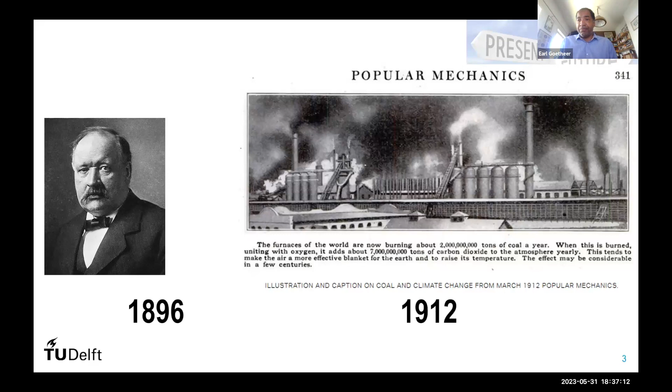And you can say, this was a paper in 1912 in New Zealand, but I can as well show you a paper from the Apeldoorn newspaper, and believe me, Apeldoorn is not a big city, saying exactly the same things. It was a paper from a little after 1930, saying it will be getting warmer. So we've known it for quite some years, and it's very hard to deny it.

At this moment in time, if you go to Hawaii, there's a nice mountain where we measure the CO2 concentrations. I looked it up this morning: 425 ppm is currently the amount of CO2 in the air. I always get the question, what is ppm? And I always say that's the same as going to a city like Amsterdam and finding 400 persons with one leg, because that's 400 parts per million. Amsterdam is roughly 1 million inhabitants. And it will dramatically change the society that we're going to live in.

And I'm a chemical engineer, so I can talk, of course, about houses and cars, but let's talk about the industry, because that will change dramatically. And now we see as an example a beautiful site in Germany, Ludwigshafen, and I like these kinds of sites. Beautiful. If you go to Rotterdam, you can see the same kind of things. And I'm trained like that. I'm trained as a chemical engineer to build factories like this.

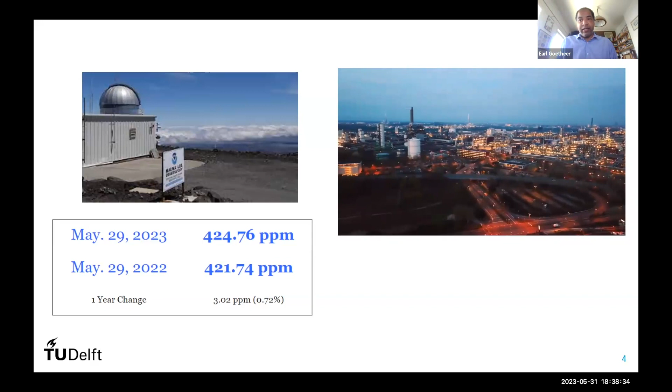But I can say to you, in the next 20 to 30 years, all these things are going to be gone, and hopefully, let's hope so, replaced by something else. So in your lifetime, you have to change complete factories like this. And it is not something that we have a silver bullet for. It's not like these nice dinosaurs saying, now we need a magic bullet to deflect our asteroid. That doesn't happen.

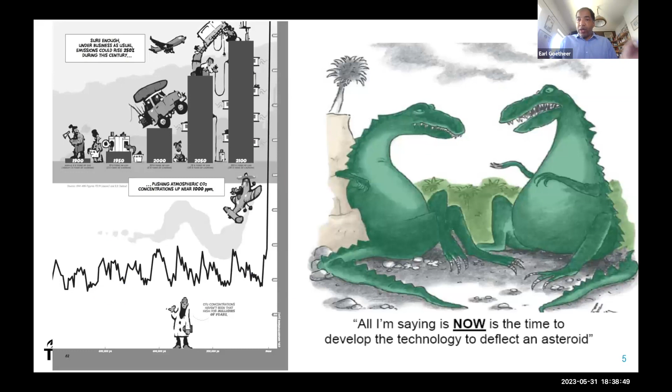So if you look from an industrial perspective, we need to do several things. There's not one thing. To really transform sites like Ludwigshafen or Rotterdam or Geleen or Terneuzen, we need to do several things. A shift to renewable feedstock, think about using biomass. A shift to renewable energy, think about electrification and using that for making, for instance, hydrogen. Doing things smarter, with process efficiency. The fourth element is circularity, bringing things back into a loop.

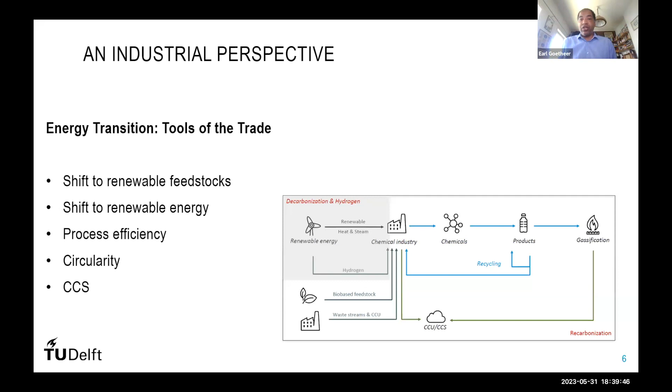And the fifth element is carbon capture and storage. Sometimes people call it CCUS, carbon capture utilization and storage. I don't like it. For me, carbon capture and utilization and carbon capture and storage are two different animals with two different rationales for doing them. But these are basically our tools. And just like a carpenter, you can't be a carpenter with only a hammer. You can't build any houses with that. The same is true for these kinds of techniques which we are talking about.

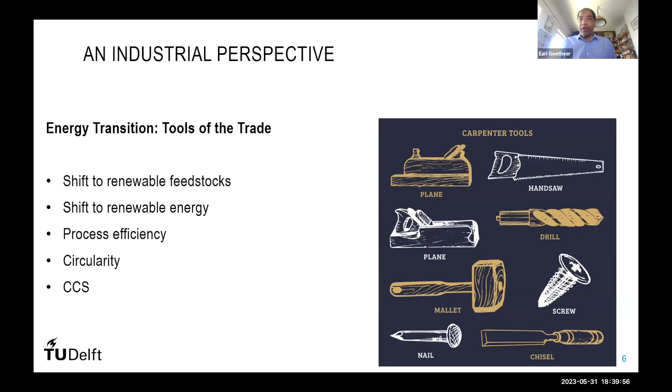So please do not do cherry picking. If you have these 5 different technologies, the 5 different directions, use them all. If you say, guys, I don't like this kind of technology, it's the same thing as going to a soccer team and saying, guys, I don't like you, let's take them off the field. And what will happen then, you will only have a team of 10 players, and most likely you will lose the match. And you can even see it in a different way.

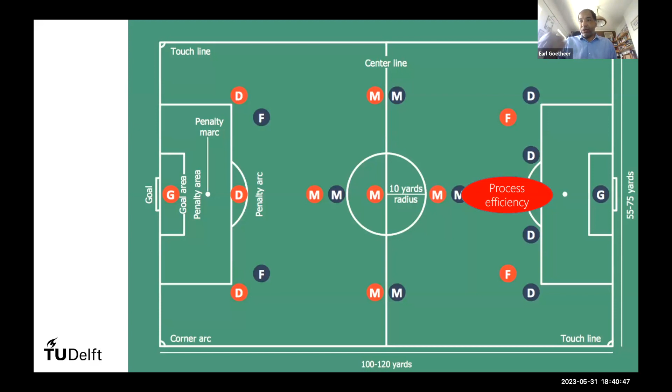Let's go further with the analogy of soccer. You always have the people making the goals. And in this case, process efficiency is in the forefront of our team, because you can do it now and you can get a business case out of that. So doing things smarter is really in front. The renewable feedstock, the electrification and the circularity, these are more in the middle. But in defense, we have carbon capture and storage. Why is it in defense?

Because I can use it nowadays with the current installations we have. We can put something behind it, and it's called post-combustion capture, capturing CO2 from the flue gases. Or we can do a pre-combustion capture system where you capture the CO2 before the burning. You can do all kinds of things, but often you can do it on the existing infrastructure. And so it is much more in defense.

But even with these 5 different technologies, we are not going to make it. So if somebody says to you, we are going for 1.5 degrees Celsius, hell no, you're going to be extremely lucky if you are around 2 degrees Celsius. And that will already be really very difficult. So we need something else. We need a goalie. And so what is in the goal? Negative emissions, carbon dioxide removal, basically capturing CO2 from the air and storing it permanently.

Why do we need that? Because we are going to overshoot like crazy. Everything we put in the air, so I'm now exhaling, that's 4% CO2 in my breath, will stay there for hundreds of years in the atmosphere. So all the CO2 which we are now emitting, you have to get it out of the air. Not me anymore, I will be retired. But you have to get it out of the air. And as already said, 400 parts per million in a city like Amsterdam is like finding 400 persons with one leg in Amsterdam and bringing them together in one room. You can imagine how much energy that will take.

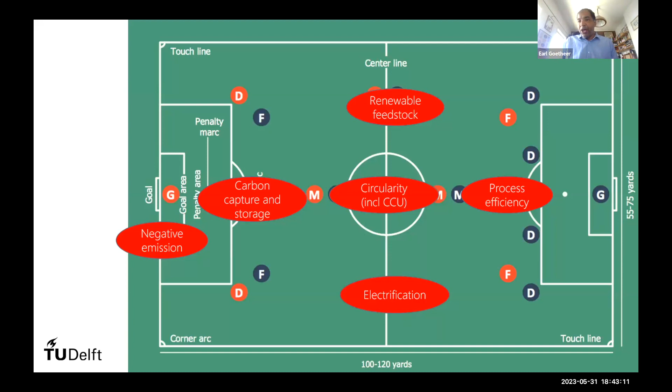So let's play a game of Mythbusters. You all have seen the series of Mythbusters. Let's do a special on carbon capture and storage and try to tackle 5 typically mentioned myths or facts. Let's see that together. So the first one is carbon capture is unproven. Now you can hear that a lot. So we don't know how it works, this is just a test. Is it really true that it's unproven?

So at this moment in time, there are around 40 megatons of carbon capture plants worldwide available. Now, is this a lot? 40 megatons? Nah, not that much. The Netherlands is now roughly 150 megatons of CO2 emissions. So let's say 1/4 of the Dutch emissions is captured by carbon capture and storage. And many of these carbon capture storage projects are not in Europe.

They are typically in the United States, where they store the CO2 in oil fields. Not because they like to store the CO2, of course not. What they would like to do is produce more oil. So it's called enhanced oil recovery. You capture CO2 and you pump it under the ground and you push out the oil. So that happens a lot in the United States.

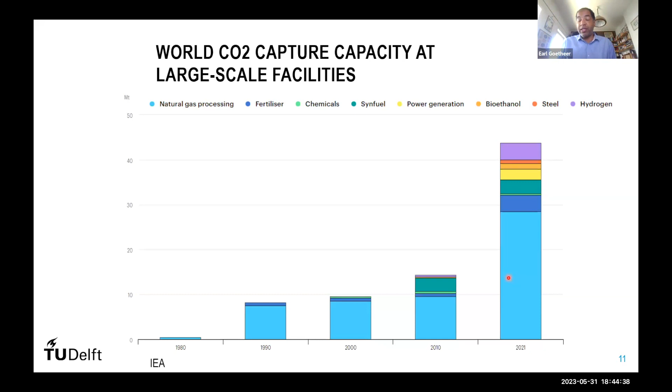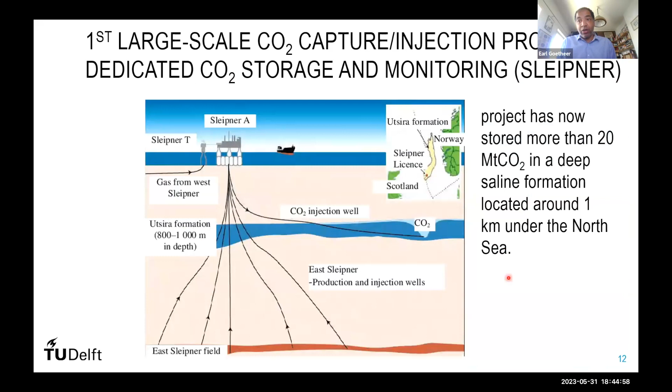But if you go a little bit closer to home, this is already happening from 1996, where there's CO2 co-produced with natural gas, and it is stored in an aquifer in Norway. And already more than 20 megatons of CO2 has been captured and stored underground. So yeah, is it proven? Yes, it is proven. The capture part is proven, and we know how to capture it, we know how to transport it, and we know how to store it.

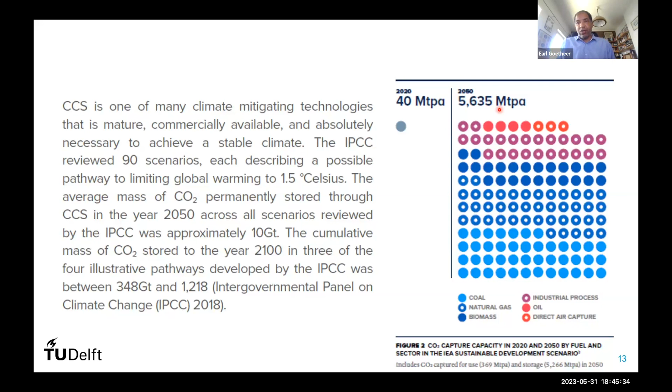But is it already developed on a large scale? Not really. So we are around 40 megatons, and according to the IEA, we need to be 2 orders of magnitude higher. So you can imagine the amount of scale up that is still needed. So myth 1, CCS is unproven. No, it is proven. We know how to do it.

Second myth, is it unsafe? Now, let's go back to what is carbon capture and storage. First of all, you have to capture it. Then you need to transport it, and then you need to store it. Now, capturing is just like any chemical factory. We know how to build chemical factories. So that's not a point of concern, really not. Transporting of CO2, either by pipeline or by ships in the form of liquid CO2, we are already doing that for 40 years. There are thousands of kilometers of pipeline, especially in North America. So we know how to transport it.

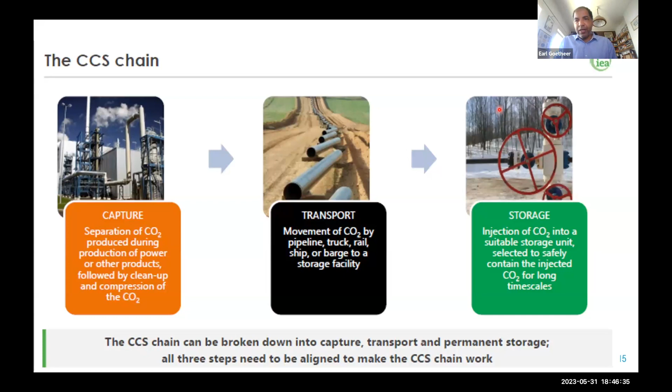Then storing it. Basically what we are doing is the reverse. In the Netherlands, we have a lot of discussion about empty gas fields where we want to store the CO2. In these fields, for millions of years, methane has been there. And the reason why is because you have all kinds of caprock on top of it. It basically seals the location where for millions of years natural gas has been trapped under it. So in the Netherlands, we have claystone, hundreds of meters of thickness, which prevents the methane, or in this case, the CO2, from getting out.

So yes, we know how to store it. We know it can be done safely. Of course, if you're going to put too much pressure into the field, you can blow off your caprock. But we know what the historical pressure was of that field. So we know what not to exceed. So yeah, we can do it quite safely.

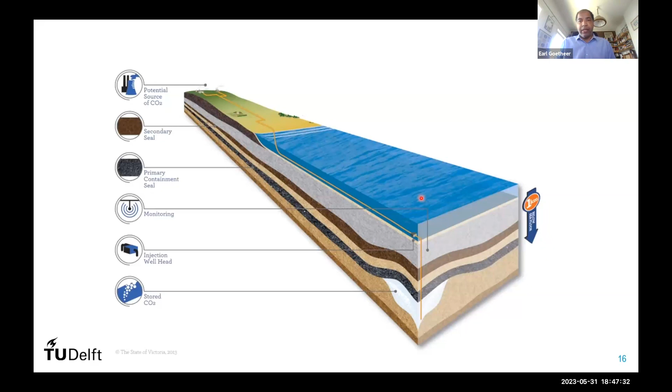The third myth, as I often hear, it is too expensive. Yeah, but what is too expensive? These are numbers coming from the United States, but they're roughly similar in Europe. Of course, if you want to do direct air capture, that is quite expensive. This is in dollars per ton of CO2. That is really expensive. I already said, please, let's limit that as much as possible. I don't want to capture CO2 from the air.

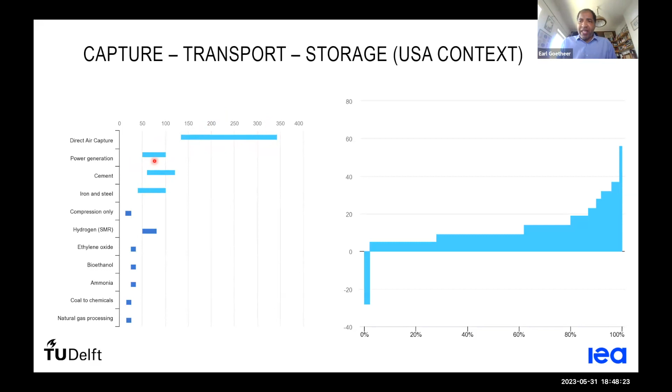So let's go back to the case of cement. That is the price of current cement, unabated. And if you want to do CCS, the price increases by 30–40%. The same holds true with steel. This is the current price of steel, and if I want to capture my CO2, we are looking again at a 30–40% increase. And if you want to go to hydrogen, that's even more expensive. But that's not the price which we are paying.

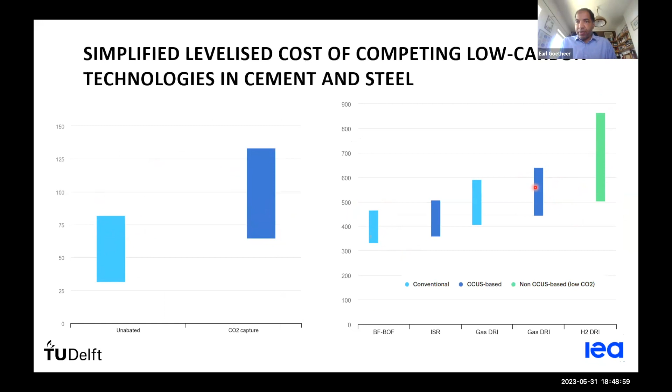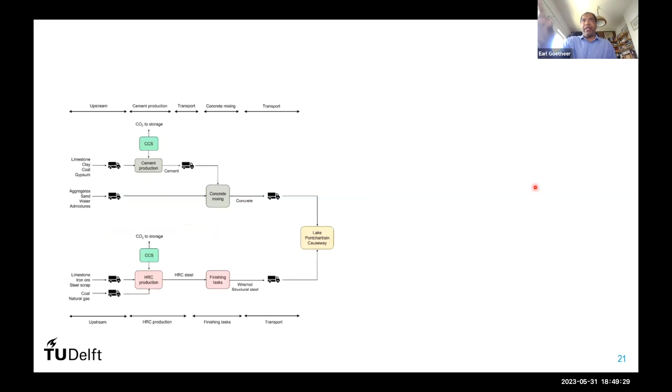So I'm very happy that one of my colleagues, Andrea Ramirez from the Technical University of Delft, together with colleagues from Norway, made a beautiful study looking at whether carbon capture is really so expensive. And they said, let's make it very practical. Let's focus on a bridge. For a bridge we need steel, we need cement, we need a lot of construction work. Let's see what will happen with the cost. So they took everything into account: upstream, the cement production, transport, mixing, the building, all to build a bridge.

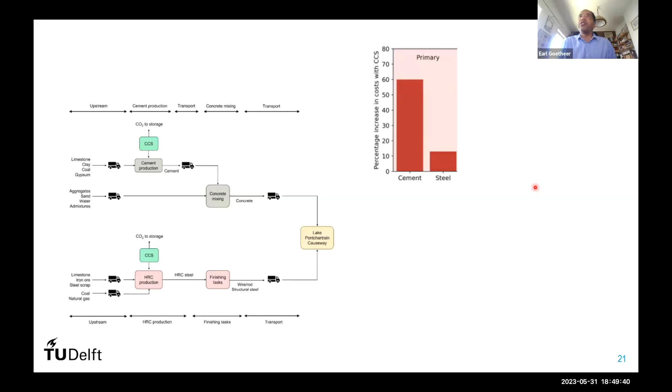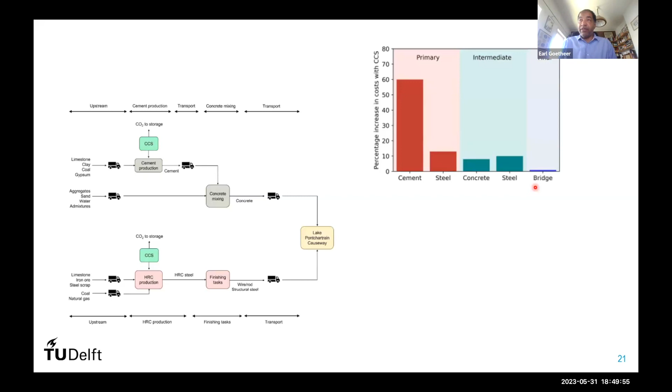And of course, as I already said, the prices of the raw materials increase quite a lot: 60% in this case for cement and 13% for steel. But if you look at the final product, the bridge, the price increase was only 1%. Just 1%. And for that 1% price increase, we had a reduction of our CO2 footprint of 50%. Only 1% in price increase.

The same holds true if I would have a car made with CCS-based steel. The price of the car will increase by a couple of percent. Not a lot, but it has a major impact on the amount of CO2. So is it too expensive? Nah, I don't think so.

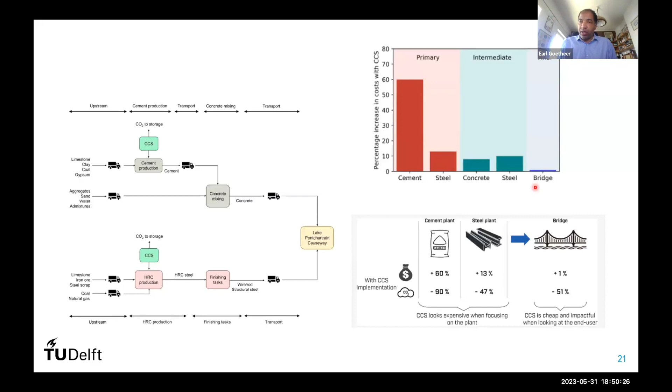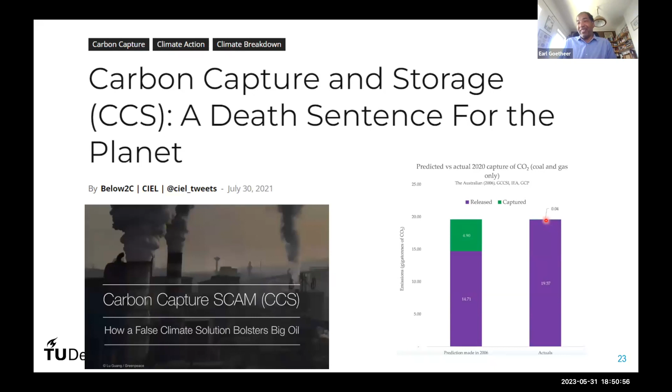So that's positive. Now, myth number 4: CCS prolongs fossil life. You get these kinds of nice quotations: carbon capture, a death sentence for the planet. That's a scam, basically. We promised this, but in reality we capture only this part. Yes, there's a part of truth in it. Because we can do carbon capture and storage, fossil plants will still be in operation. But what is the alternative? I already said, do not do cherry picking, because the alternative is, who's going to produce your cement? It's going to come from China or another place.

And of course, you can say we don't produce CO2 here in the Netherlands, but all the products which you import come with a CO2 penalty just as well. And then you can say, there will be new technologies coming up. Yes, but it will take some time before they are implemented at this scale. Think about the challenge that we are having with wind energy. How fast can we deploy that? So it will be very difficult. You need to be serious and talk about the time factor which comes into play.

And if you say, we will wait till these technologies are there and scaled up, at that moment in time you're still emitting that CO2, because you still need cement, you still need steel, as an example. And later on, you have to get it out of the air. Very expensive. But what's now going on is that we are putting 3 elements together on one big pile, and the pile is a little confused because you have 3 different drivers. First, the climate. For the climate, it is all about CO2, methane and these kinds of greenhouse gases. If you just limit those going to the atmosphere, you're okay.

But then you have the energy transition, where people say, let's move away from fossil. And the third thing people are saying is you have to have clean air. Think about removal of NOx. These are three different drivers. And now we put everything on one big pile, but you really have to deconstruct it into these different drivers to really understand what's the best thing to do.

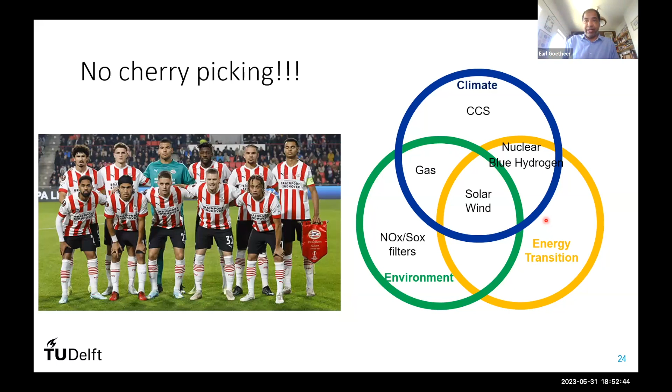And then the last myth: there is not enough capacity to store. Our friends from the geological department have studied this a lot and looked at different locations to put it in.

So in the Netherlands, we talk about empty gas fields, but you can store it in aquifers, you can store it in empty oil fields, you can store it in so many places. And in the North Sea, only in the North Sea, there's at least 200 gigatons of capacity. Right. Now, what does a gigaton mean? Worldwide, at this moment in time, the worldwide emission of CO2 is 30 gigatons per year.

But look at the other reserves all over the world. The reserves are there for decades where we can store our CO2. So basically, in conclusion, we have 5 myths, where one, like CCS prolonging fossil, has a sense of truth in it. The rest, I think, these are myths.

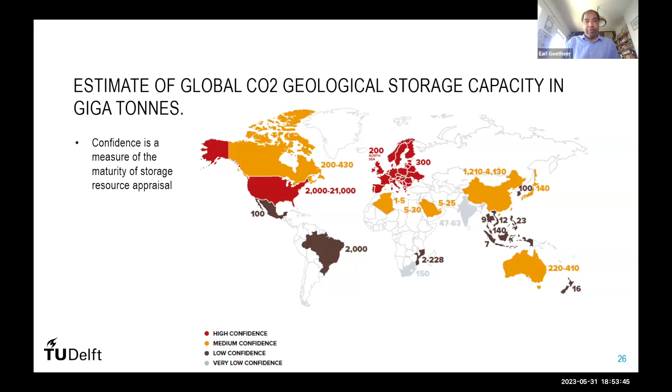Now, what I think will happen in the next coming 10 years, already that fast, you will see a massive amount of projects going to be launched. In the Netherlands, Porthos in Rotterdam will be going basically to completion. You will see Aramis, which is also on the North Sea off the Dutch coast, another project. But the front runner is Northern Lights.

It's a project in Norway, which already has been funded, where people can transport the CO2 as liquid CO2 by ship, bring it over there and store it in an aquifer. And as an example, Yara in Sluiskil has already said by 2025, 2026, we would like to bring 800 kilotons per year of our CO2 over there to be stored. So I think all lights are on green, at least for now, for carbon capture and storage.

And just because we are all engineers, I would like to give you one more example of the things that are happening in the Netherlands. Because in Europe, the Netherlands and Norway are the leading countries in carbon capture and storage. One of the nicest examples, for the people who often go to Arnhem, is this location in Duiven at AVR, a waste incinerating plant. They are currently capturing CO2 from their flue gases. It's a 100 kiloton scale plant where they capture CO2 using post-combustion capture technologies and bring it to horticulture.

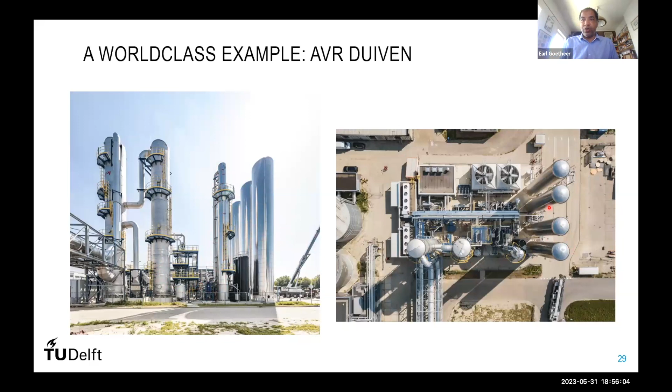So with this, I would like to thank you for your time. And I know carbon capture and storage is not a swan. It is just plain ugly. That's just the truth. But even ugly ducklings have a right. And I think in this case, this ugly technology, or this ugly feeling around this technology, it is really essential to be deployed. Otherwise, we will be way, way above the 2 degrees Celsius, and later on we will have to pay the ferryman.

And at the end, I would like to give you this quote from an oil minister from Saudi Arabia. He already predicted that the end of fossil will come, because we will get something better. But to get to something better, we need intermediate technologies. And carbon capture and storage is one of these intermediate technologies, making the bridge to something better. So I'm very happy that I could still give this talk to you, and I hope you found it interesting.